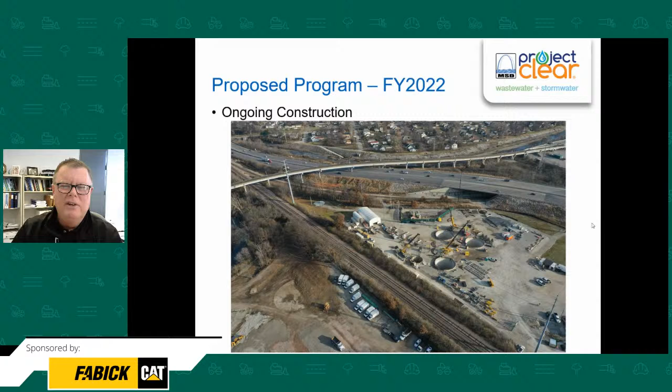This is the Deer Creek, a couple pictures from the Deer Creek project that I talked about. As I indicated, we got 2 contractors working this area. This is anywhere from 8-inch to 54-inch diameter sewers, typically about 30 feet deep. If you're familiar with the Deer Creek area, the project started out in Maplewood, went through Brentwood, through Ladue, and will end up in Frontenac.

So I apologize for that. I meant to turn my phone off.

What you're seeing there, on the right-hand side, is us getting 30 feet deep in the Deer Creek watershed. We run into quite a bit of rock, so imagine we're doing a lot of blasting through a lot of residential areas. We'll keep working on that project, and it's scheduled to come online, I think, in early 2023.

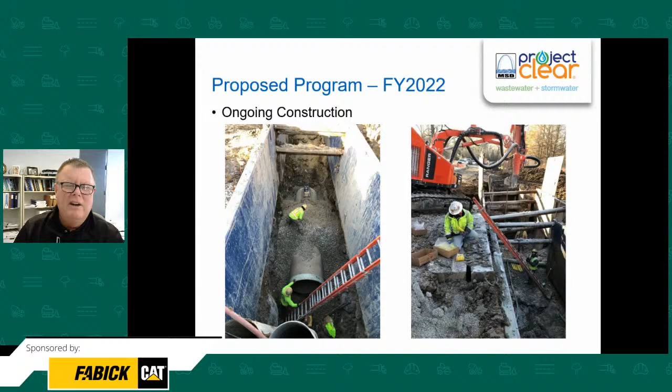Another big dollar amount we have is on facilities. We're starting up a new facility at our Lower Meramec plant, and that is scheduled to start this fiscal year. That $48 million is just a portion of that funding.

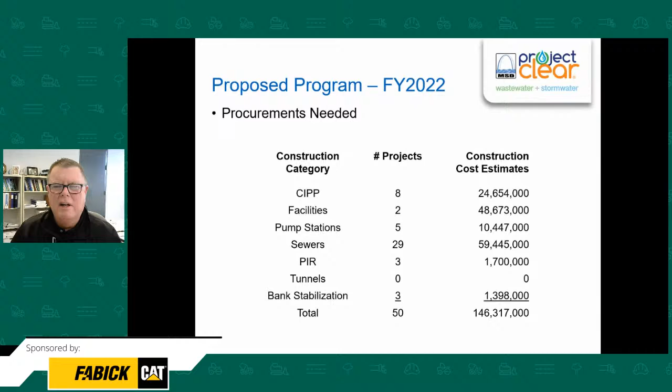We'll start off. I'm going to go through each one of those categories that I listed there before. These are the procurements needed, and the CIPP is cured in place pipe. This is our extensive rehabilitation program that the district started back. We've been lining and rehabilitating pipes as long as I've been here at the district, for at least 30 years. We're very fortunate here at MSD to have 2 of the larger rehabilitation contractors in the country working right here in our backyard. That's beneficial to us because we are doing a lot.

We've typically, for the last 10 years, been doing anywhere from $70 to $100 million worth of pipelining a year. We do that for two reasons: to rehabilitate our system out there, the 900 miles I talked about, but also to eliminate inflow and infiltration into our system, which is our primary driver, to tighten up our sanitary system and reduce overflows.

So we have 8 new projects coming up this next fiscal year for a total of about 24 million. That is down, but we've purposely gone that way. We've spent the last 4 or 5 years really front loading that type of work, and it's really been successful, allowing us to reduce the inflow to our system and eliminate some of the projects we originally had planned for our program.

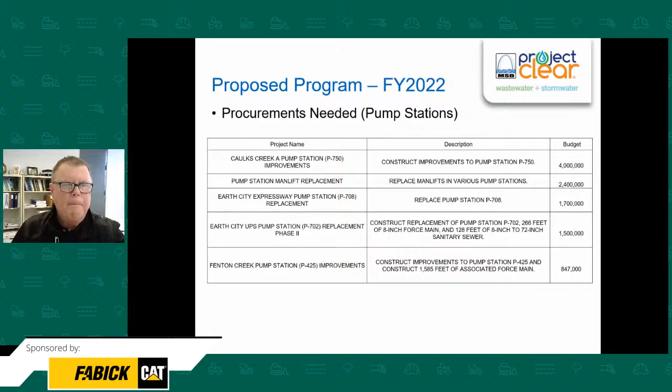Next is the biggie, which I talked about earlier. The next four slides list 29 new sewer projects that the district is going to perform over the next year, putting them out to bid. There's 29 projects listed here.

We're actually going to be replacing close to 60,000 feet of new sanitary sewers -- typically a replacement of existing sewers, or even providing new ones. The pipe sizes range anywhere from 12-inch all the way up to 108-inch.

The top project, the Harlem Baden project, is a large multi-phased project we've been building on -- probably a 10-year project. It's actually a project we're working on with the Corps of Engineers, and Mike Feldman's going to follow me on that. The Corps has actually built some of that work for us, providing funding, which allows us to reduce the funding required from our ratepayers to build this large combined sewer relief project.

On the next four pages I've highlighted one of the projects for a bit more information. Right in the middle is the Warson Woods Sanitary Relief, about almost 2 miles of sanitary sewer, correctly named since it basically goes right through the heart of Warson Woods. If you've been there, right off Manchester, it goes right down their main street. It's a very complicated, multi-year job.

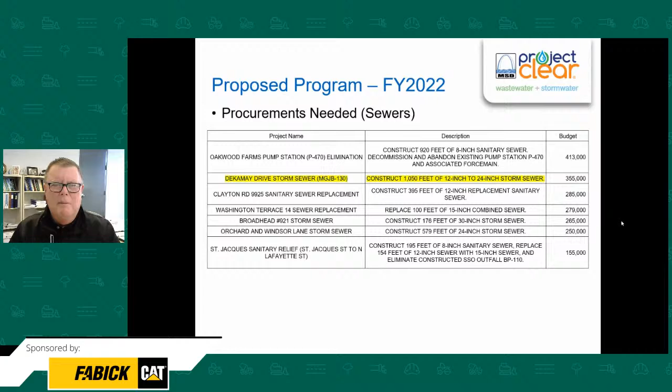So again, this really concludes the bulk of the sewer work that we're performing over this next year. I think you'll see this type of work—we've been doing this type of work for the last few years, for a couple more years. I'll give you a little quick look ahead: a lot of our projects become larger and more extensive and costly, so we'll see less of the number of projects, but still keep the dollars up there.

PIR, you probably wonder what does PIR mean? It's private inflow removal. I mentioned building new sewers and increasing capacity of our sewer system. In addition to that, we have stormwater that enters our system either through the sewers themselves, which is why we do a lot of our rehabilitation of our sewers. But we also have just direct connections—areas that specifically have storm sewers that maybe weren't supposed to be connected to the sanitary sewer, or there's an area where the homes were built that have connections to the sanitary system.

In other words, our entire city is a combined sewer system where the storm and the sanitary go together. But then when development happened, they went out to the county and the near county, and the Shrewsbury, Webster Groves, Brentwood area, and they built the same homes and connected that right to the sanitary.

The sanitaries weren't really equipped to handle the stormwater, so now we're going back property to property to try to eliminate that. These 3 PIR projects total about $1.7 million, and we're actually going individually onto over 200 projects, 200 individual homes, to remove connections.

It can be anywhere from a downspout to the sewer vent in the front yard, or even a storm sewer where there's a low spot in the backyard and somebody built a connection, saying, oh, here's a manhole, I'll connect to it. We've got to get that off. That's one of our main components that drives those overflows we're trying to get rid of.

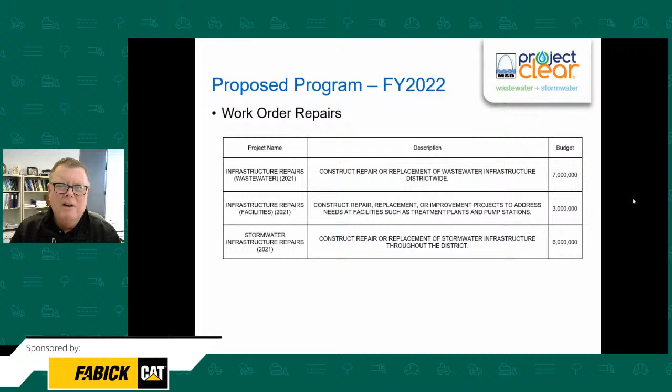What it really amounts to, looking at the top line there, is construction and repair, and I'll talk a bit about what I call our small contractor program. We bid out close to 400 projects a year that are under $50,000. That gives an opportunity for new, smaller, and minority contractors to participate in our program.

We don't necessarily put together full sets of plans on these. These are typically sketches — we provide them to 4 contractors, they give us bids on it, and we do the work. So there's 400 projects outside of the 148 I showed you earlier in the program. I'll talk a little more about that when I discuss doing business with MSD.

Again, if all that $350 million wasn't enough, there are occasions where some of those projects I've listed have issues getting easements, or we have struggles with other utilities. So some of those projects could slip — in other words, we don't have them ready to go and aren't able to bid them. We try to keep projects in the queue, and we call those contingency projects.

We have a total of $125 million worth of projects sitting there and waiting in case we have a project slip and need something ready to go. It's our goal to maintain our program at that level and get this work done. These are all needed projects, so the ability to bring those forward is a good thing. We didn't always have this; we've only done it for about the last 10 years. We set up our capital program and got board approval to allow us, if funding is available, to move projects forward.

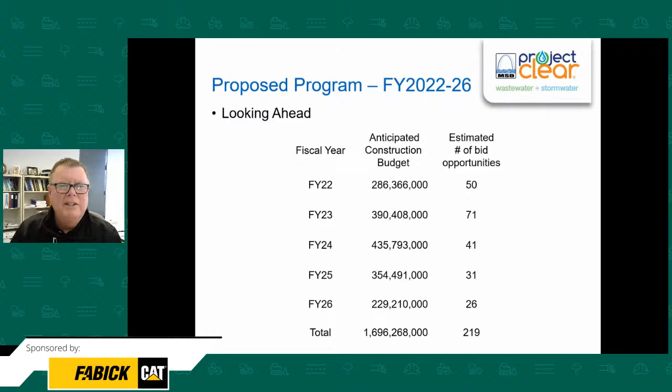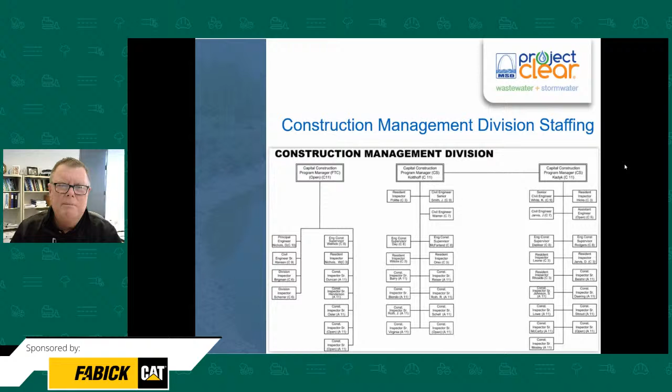I'm going to skip over some of this since I'm running short on time, but the slide presentation shows our organizational chart for MSD. I have 4 divisions. We have a construction management division that manages all of our program, run by Alan Mueller, who has 3 divisions under him. If you do work for MSD, I'd recommend going to our website and looking at these names and faces, since they're the ones who come out and look at your jobs on an everyday basis.

Before I run out of time, I do want to touch on this: the district has a proposition on the ballot April 6th — Proposition Y. The district funds its programs on a 4-year rolling program, and every 4 years we borrow dollars to support that program. It supports the work I've talked about, basically the wastewater program and our effort to eliminate those 50 wastewater sewer overflows.

Our 4-year program is typically about $1.6 billion. Some major projects include the Lower Meramec treatment plant and the Lower Meramec proposal. Again, it's Proposition Y — we're asking for $500 million in additional bonds for the 4 years.

Unlike other bond issues, where if you live in a municipality or school district and the bond doesn't pass, the work just doesn't happen, the district isn't in that position. If we don't pass the bond issue, that doesn't keep us from having to do the work — we still have to do it. So it's a matter of asking folks to approve bonds so we can keep the rates lower.

In these challenging, uncertain, uncharted times, you stand strong. No matter the conditions you face, you get the job done. You are the backbone of our communities. You are the hardworking men and women that continue to build. We're honored to call you our customers and our employees. We thank you for the work you've done and the work you continue to do. Together, we'll get through this.

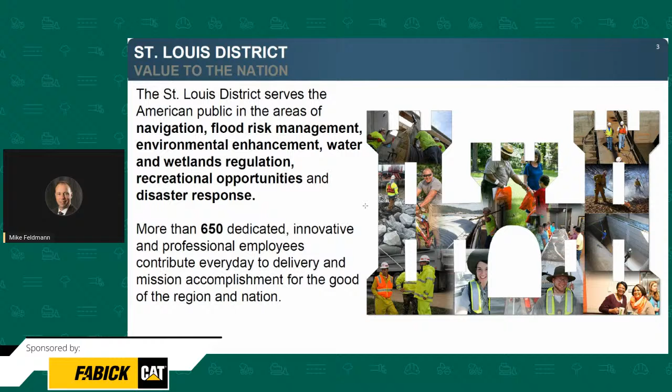So again, a repeat of some of the information I shared. One thing I did want to note is just the size, personnel size of our district. There's about 650 employees in our St. Louis district, a handful of active military. We are led by Colonel Kevin Golinghorst, our district commander. There are 4 or 5 different active military; the rest of our district workforce is civilian government employees. We do a lot of work with several arms of the construction and services industry. A lot of what we do would not be possible without the help and partnership of contractors.

I'm going to focus in a bit on our bigger and most impactful missions. Our navigation mission obviously is one of the most impactful in terms of its impact on the local and national economy, across the entire globe actually. There are 3 rivers - you saw me highlight the Kaskaskia and the Mississippi River, but there is also active navigation on the Illinois River. We have 80 miles of navigation channel in our St. Louis district boundary on the Illinois River as well. That all adds up to about 400 miles of navigation channel that needs to be maintained, monitored, and surveyed on a regular basis. Of course, we mentioned the 5 locks and dams.

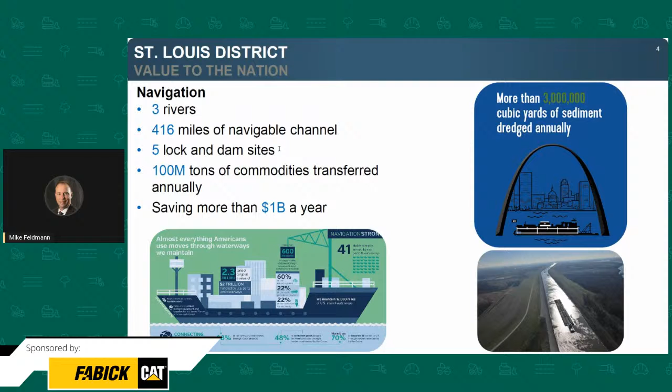The newest of those 5 is the Mel Price Lock and Dam, which was built in the 80s. Ironically, when I started working with the Corps of Engineers, I started that construction project. Aside from that facility, the rest of those other locks and dams have been in place for several decades - 24 and 25 were constructed in the 30s. So a lot of maintenance and rehabilitation has happened on those facilities, and there's definitely a need for continued attention and some expansion in those. I'll touch on some of that in future slide decks as well.

I promised you I'd talk about our flood risk mission. This is the place to spend just a little bit of time. I threw out some stats earlier, I'll repeat them. First of all, with 5 Corps lakes, 4 of those 5 reservoirs were constructed for flood risk purposes. They certainly support recreation, water supply, and a few other missions, but their primary purpose is to attenuate flood flows before they enter the Mississippi River, and they have a tremendous impact on the extent of flooding when there's a high water and high rain event in the St. Louis area. Over and above that, you heard me mention over 750 miles of levees.

About half to two-thirds of those levees were federally constructed, and the remainder were privately constructed. All of them, except the Chain of Rocks levee, are privately owned, operated, and maintained. Our mission is to construct them, then we generally turn over ownership to a local levee district. So you won't see federal employees involved in managing those systems, aside from Chain of Rocks. However, during a flood event, we have teams supporting those levee districts closely with information and assisting with flood fighting activities. Most importantly, after flood events, during recovery, we have the federal authority to implement construction projects to repair damages to those levees.

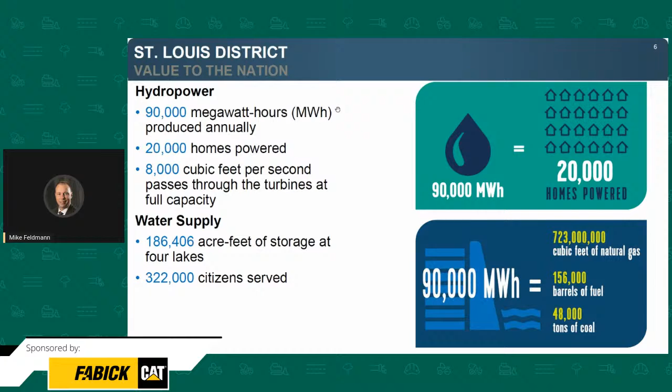Some additional mission coverage that will help you understand what we do and how you can engage with us. We do have a hydropower plant at Mark Twain Lake, the Clarence Cannon Dam and Power Plant, which was completed in the 80s. That is federally constructed, but operated by the Southwestern Power Administration. We do have some partnering with them in terms of occasional rehabilitation and repair work. And of course, all of those reservoirs have some water supply mission where they provide water supply services to the local communities in and around them.

Maybe for some, the number one familiarity with the Corps of Engineers is recreation. All of those lake facilities have campgrounds, beaches, day use facilities, boat ramps, a lot of recreation opportunities on all of those Corps of Engineers facilities. And all those recreation facilities generate a need for support services as well. I'll be able to highlight some of those requirements coming up shortly.

This is, I believe, the last slide to talk about some of our missions. I wanted to highlight the ecosystem restoration mission. That's another very impactful mission that generates a lot of construction in the St. Louis district. A key word, if you've worked with us before or start to engage with us in the future, is the UMRR program, Upper Mississippi River Restoration Program. It's a program funded annually, operated by three Corps of Engineers districts: St. Paul, Rock Island, both to the north of us, and St. Louis. There are always one to three projects in the construction phase in the St. Louis district within that UMRR program—a lot of wetland restoration work, small pump construction, ditching projects, some small dredging projects, etc. The ecosystem restoration mission generates quite a bit of work in the district. I'll highlight a couple when we go through requirements, but if you don't see something that works for you this year, you can rest assured there will be several continued projects like that in the future as well.

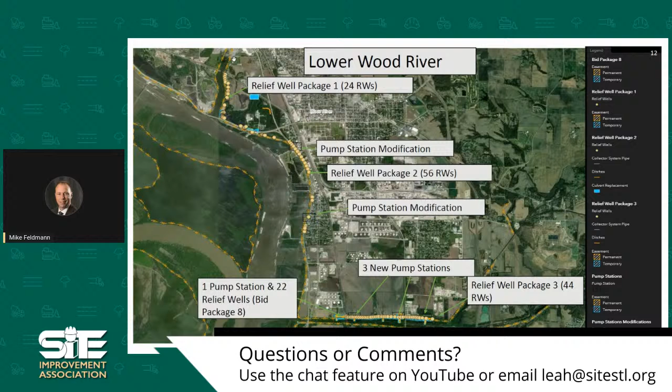So to orient you, here's the Mississippi River, here is the Missouri River confluence, and up here is the Mel Price Lock and Dam in Alton. The Clark Bridge into Alton will be just off the screen to the left. As you travel downstream on the river, you'll get to the area where you have Roxana, Wood River, and Hartford—a lot of refinery infrastructure in that area, and also several small communities that are all protected by this lower Wood River levee that was constructed back in the 50s and 60s.

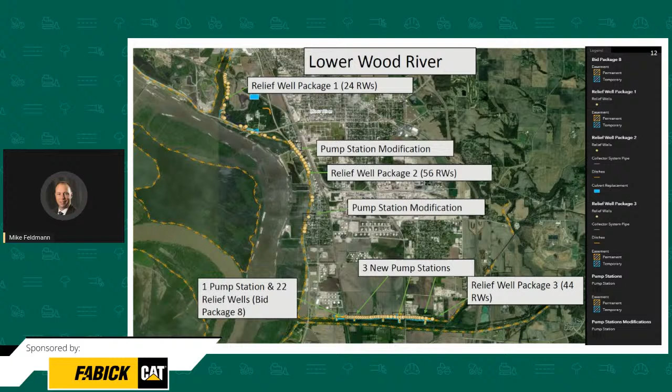So you can see by the indication of the dots where we are doing some modifications to pump stations, constructing 3 new pump stations on the lower end, and a series of relief well installation projects all along that levee. So look for those—always excited to get some good competition and some great contractors doing that work with us.

Moving on to some more general work that doesn't have any real good category to fit it within. That Chain of Rocks item is a pump station replacement. That's part of our flood recovery mission—a pump that was damaged in the 2019 flood, so we will be replacing that.

The second item—again, recall my first slide where I was talking about the Mississippi River and managing the navigation channel—we have a robust mission for revetment work, construction of river training structures such as dikes, weirs, chevrons, several types of structures like that, all river-based heavy construction work. This is a multi-year contract that we will be moving out with later this fiscal year to be able to do that work for the next 3 years.

Moving down the line, Bois Brule is a levee district in the Perryville, Missouri area. This is the last project. We are waiting on some access to some real estate by the sponsor, and then we'll be advertising that restoration of the levee height and also some seepage berm construction contract.

The last 2 items are the beginning of a pretty significant investment in the Mel Price Lock and Dam, doing some work to modify the lift gates on the 1,200-foot lock at that facility. There will end up being 3 construction contracts, but the first 2 will be awarded later this fiscal year. One is a supply contract to fabricate and deliver new lift gates for that lock facility, and the other is to do some modifications to the lock itself to accommodate that new lift gate, which has some design changes to it that will be installed. And again, the third contract in the distant future will be the installation of those gates into the newly modified area.

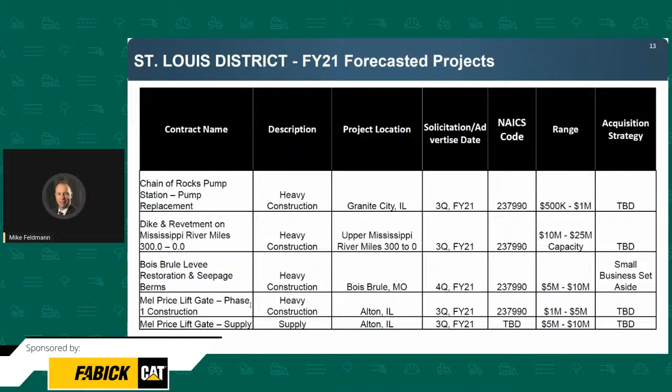One of the missions we have in the district is to work with the Environmental Protection Agency, EPA Region 5, on the Illinois side of the river. We are working basically as their construction agent, doing zinc remediation work at several sites in the Illinois area. So we have a remediation contract in place.

However, there is a requirement for some consulting services contracts to do site monitoring at those sites, as well as several other sites within the St. Louis district. So we have a requirement coming out later this fiscal year to reestablish that contract. It's another one that we went through the capacity pretty quickly. A very robust mission, and looking forward to getting that one back on contract.

We do have a few more. You'll see those Wood River contracts kind of repeated here, but I did want to focus in on them. On this page, I wanted to highlight this demolition of the old interpretive center. This is work that we're doing for the Department of Energy, which owns and operates the Weldon Spring site on Highway 94.

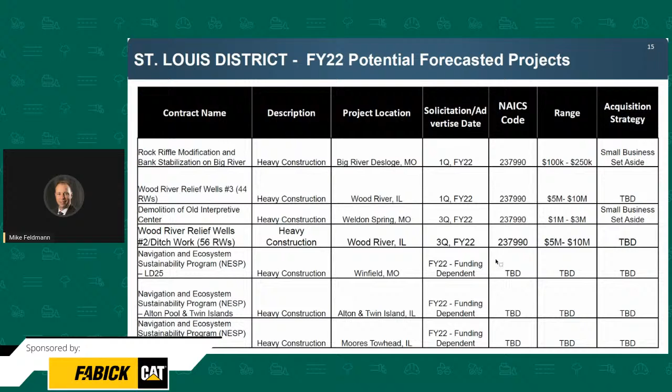We've done some initial planning and have some design work ready. We cannot schedule the award of these contracts because we need construction funding to come before we can start to talk to the construction industry about dates, but we want to get you all aware and ready for that requirement, because if and when we receive that construction funding, it'll be a pretty robust program that'll begin to move forward.

I went through those pretty quickly, but that's the requirements we have. These last few slides are going to focus on contacts and how to reach out and learn more about us.